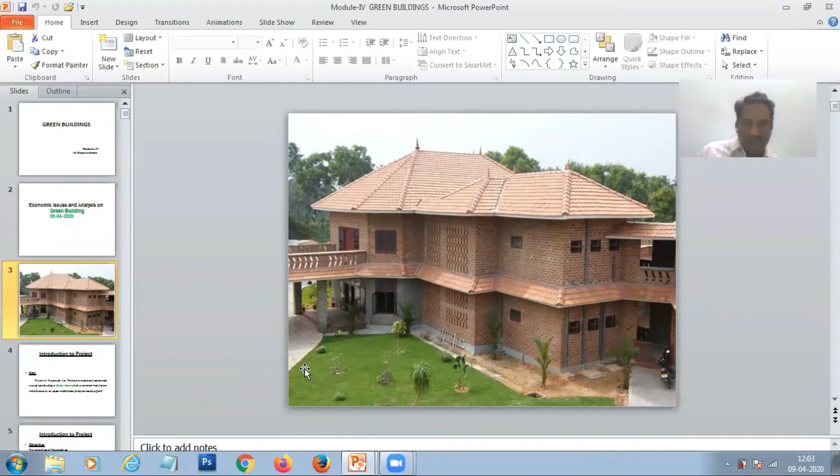This building is a green building which is made up of fly ash bricks and full of landscaping, etc. In this today's topic, we will introduce a project.

The aim of our project is to find out a simple and economical way of constructing a green home, which is affordable to a common man. That means from higher level of middle class family to a middle class family.

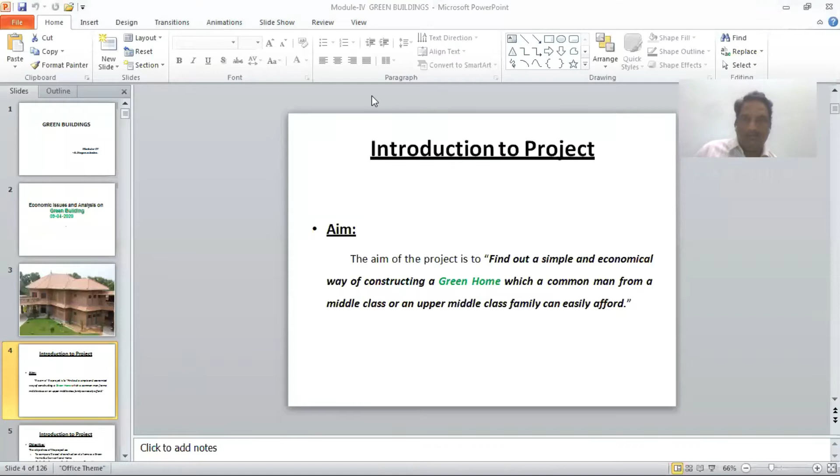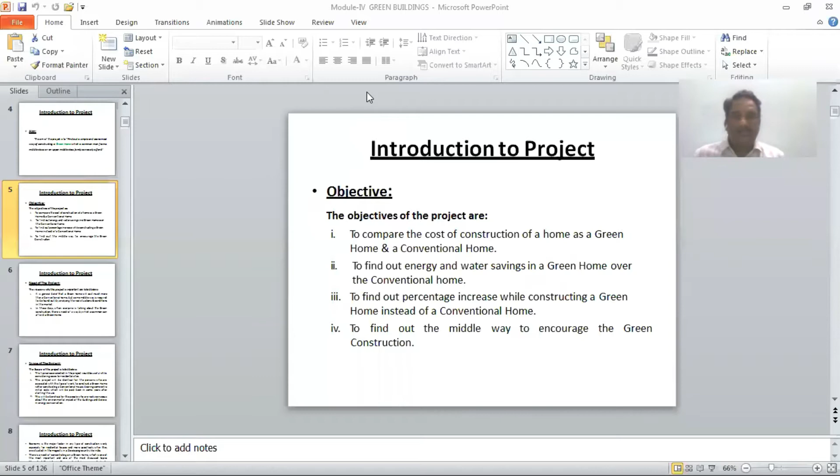For that affordable green home, we are today discussing. Second objective is to find out energy savings and water savings in green building over conventional building.

And the third objective is to find out what is the construction cost increase in green home and conventional home. That means the cost difference between normal building and green building.

The last objective is to find out the middle way to encourage the green building construction. That means finally what we have to do, we have to encourage the green building construction.

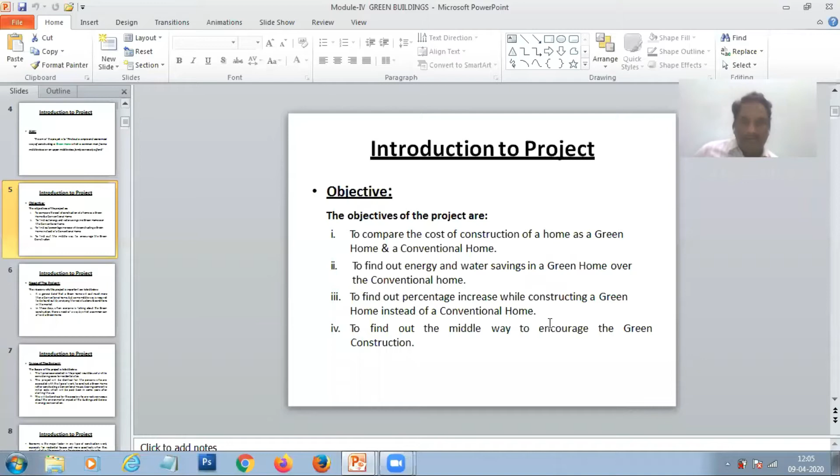Need of the project. What is the need? What is the necessity of the project? The reasons why this project is important are listed below.

It is general belief that a green home will cost much more than conventional home. That means for normal building cost and green building cost, the cost of green building is much more than conventional building cost.

Much more than conventional home, but some middle way is required to find out analyzing real situations and conditions in the market. That means we have to identify how to afford the green building with moderate economical construction. That is the need.

Second need: in these days, when everyone is talking about green construction, there is a need of a way by which a common man can afford a green home. That means a common man can afford to buy or to construct a green home. That is the need of our project.

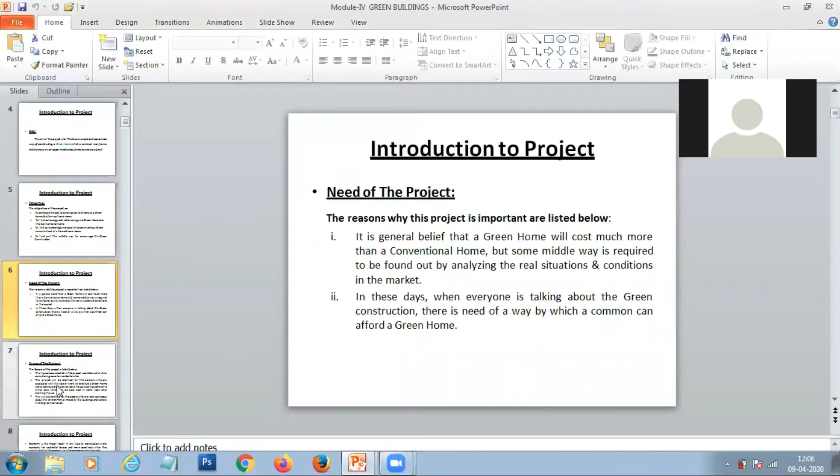Next, scope of the project. So what is the scope? The typical case selected in the project would be useful while considering cases for residential sites.

The project will be identical for persons who are associated with this type of work to construct a green home, rather than constructing a conventional house, bearing some extra initial cost which will be paid back in some years after starting the use.

That means after construction of this green building, you can avail the benefit after payback. That means you will get the benefit after the usage. That is the profit given by green building.

Hello, are you able to hear? Yes, sir. Okay, okay, okay. Okay, okay. Yes, sir. Okay, ma.

Next, the third scope of the project is this will be beneficial for the people who are really conscious about the environmental impact of the buildings and believe in energy conservation and energy savings. That means these projects are really beneficial to those who are aware of environmental impact and environmental sustainability and who look after a healthy environment for the inhabitants. These are really useful.

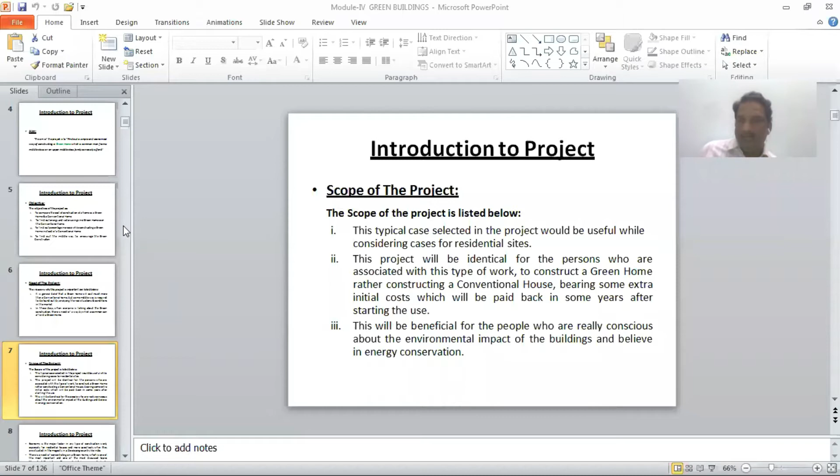Introduction to the project. Economy is the major factor in any type of construction work, isn't it? Economy means with less cost, more benefits should be achieved. So that is called economy, right?

Especially for residential houses, and more specifically, when they are situated in developing countries like our India. So there is a need of concentrating on a green home, which is one of the most important and most discussed topics throughout the world.

In the age of now global warming and climate change worldwide is happening now. So this is a compulsory need. In this situation, some middle way is necessary to find out to encourage the green constructions.

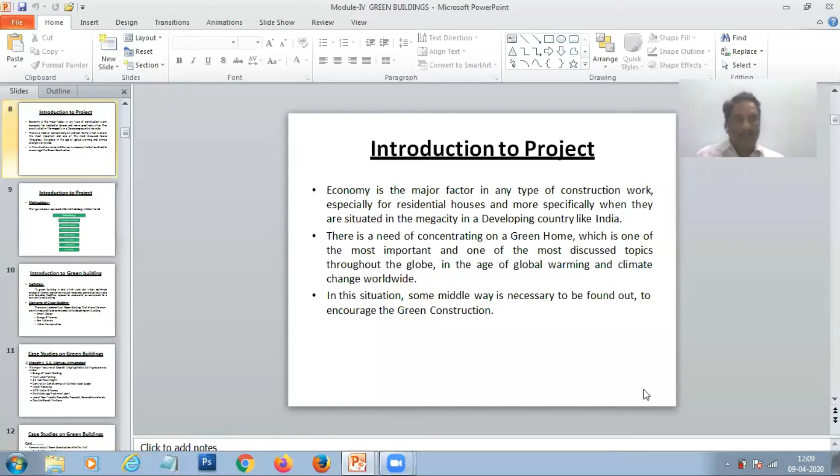Second, we have to estimate the quantities. What are the quantities required? That means what are the materials required for this green home construction, and any changes in decisions.

And next one is market studies. We have to compare the market to procure the materials. So we have to study the market, and we have to analyze regarding cost.

Cost analysis should be done, and you have to compare with respect to cost, which one is cheaper, which will give the lesser cost, and which will give the quality material. You have to compare, and you have to procure quality material with less cost, and you have to give a conclusion. Okay, this is the methodology.

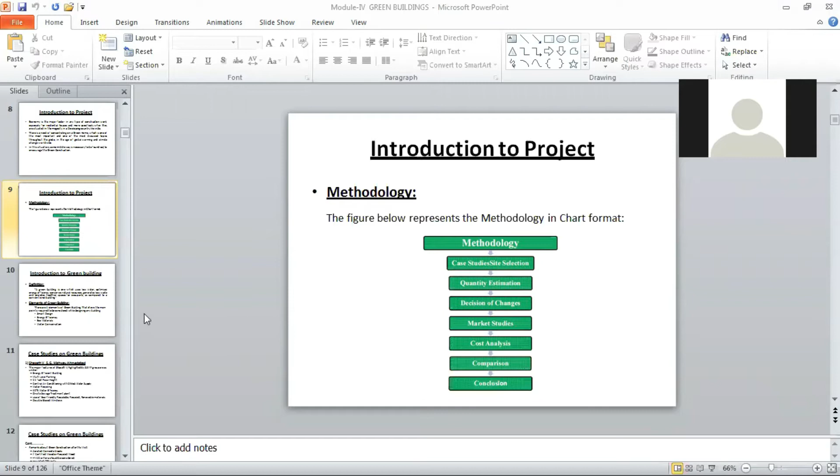What is green building? The definition is: it is one which uses less water, maximizes energy efficiency, conserves natural resources, generates less wastage, and provides healthier space for occupants compared to the conventional building.

Hello. Yes sir, yes sir, okay. My video is audible to you, I mean visible to you. Yes video, yes audio sir. Okay, okay, okay, yes sir.

Okay, elements of green building. Now please, please. So mainly there are four elements of green building.

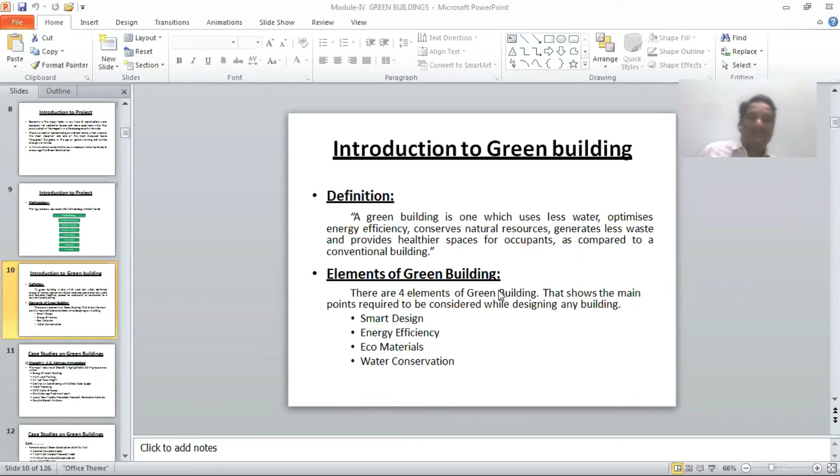First one is smart design. Second one is energy efficiency. Third one is eco-friendly material. And fourth one is conservation of water.

We will see one or two case studies in Ahmedabad, Shapath V, S.G. Highway. In this, the major features are energy efficient building, multi-level parking. You know multi-level parking, that means number of floors we can park vehicles. For example, in our Nanakramguda financial district, in Microsoft office, separate buildings are there to park vehicles floor wise. That is called multi-level car parking.

Second one is 11 feet floor height. Generally we use floor height as 10 feet. Here in this case study, 11 feet is the floor height. And central air conditioning with chilled water supply, cooling water and central air conditioning, it is there.

And water is recycling. That means used water coming from washrooms, we can reuse that water by recycling, and then that water can be used for landscaping, gardening, etc. Already we have discussed this in our classrooms. So 40% of water efficiency is saved.

On-site sewage treatment plant. That means in our building campus itself, not in our college, where this case study is taking place in Ahmedabad, there is an on-site sewage treatment plant. That means the sewage water, from our lavatories, toilets, is going to be treated, and that treated water after recycling can be used for landscaping or gardening.

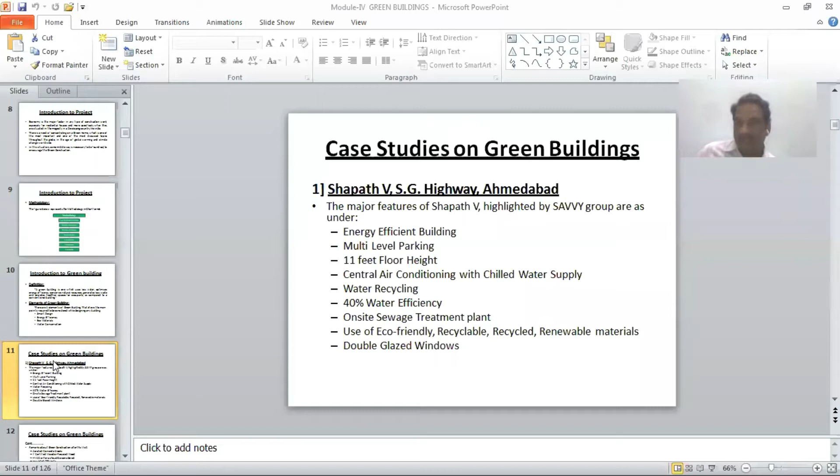Next, double glazed windows. Okay, I will see afterwards the continuation.

Remarks about green construction after visit. That means in the previous slide, those are the present building scenario, green building scenario, which was visited before the visit.

After the visit, what they find out, the remarks are: aerated concrete blocks are not used for wall construction. And the second point is their remark regarding if certified wood or recycled wood, the wood used in that building is certified wood or recycled wood - they don't know.

And next one, HVAC. Please make silence. Hello. Hello. Hello, Lokesh, someone is making very bad noise.

Okay, HVAC. What is the full form of HVAC? Anybody tell? Anybody able to tell the full form? Please note it down if you don't know. H for heating, V for... anybody, V for what? Ventilation. AC for air conditioning. Okay, that is the full form of HVAC. HVAC criteria should be considered.

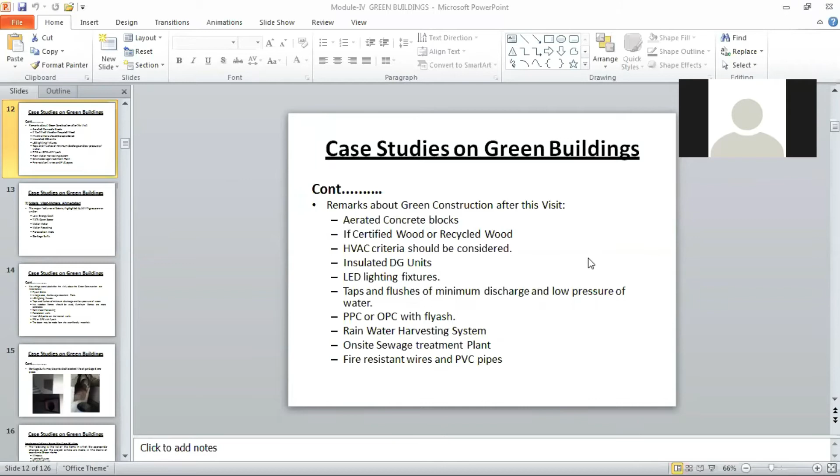Fly ash bricks can also be used for green building construction, and the rainwater harvesting system. Do you know rainwater harvesting system?

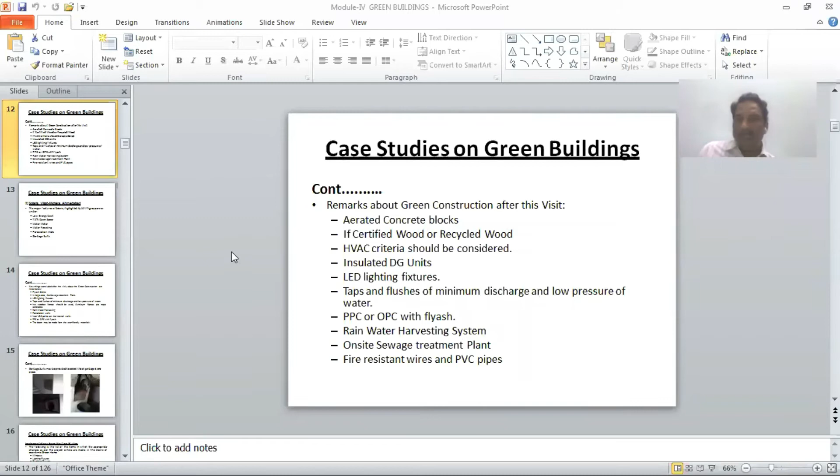Fire-resistant wires and PVC pipes. The electrical wirings in our residential or commercial buildings should be fire-resistant, and the pipes should be made up of PVC, that is polyvinyl chloride. PVC full form is polyvinyl chloride.

Okay, that is case one. The second case is in Ahmedabad, Solaris. The major features are low energy cost, and 75% open space is given.

There is also a water meter, to record the consumption of water. In every building, residential building, there will be a water meter. It will give the reading, so municipal authority people will come and take down the reading and prepare the bill. You know that very well.

Afterwards, water recycling, we already discussed. Next, percolation wells, just like recharge pits. And garbage chutes, I will show you how the garbage chute is there, to collect the garbage. Garbage means dry waste.

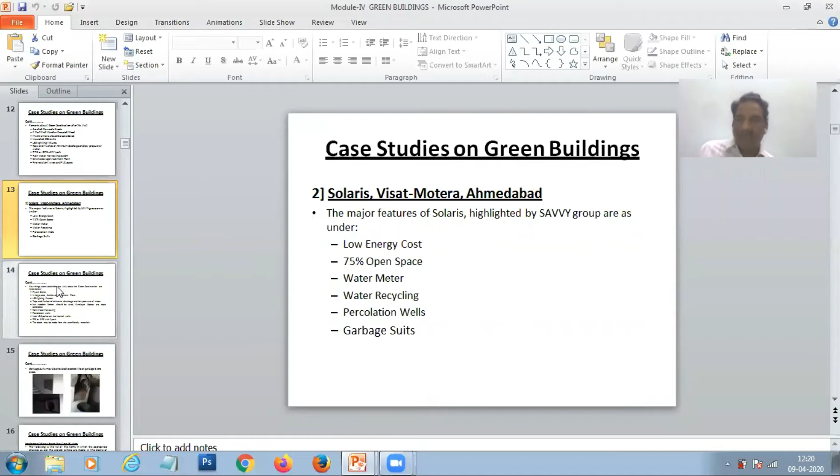Next, new things concluded after the visit about green construction. After the visit, what they found out is that fly ash bricks are used in this construction.

In the large area, a sewage treatment plant is there, and for lighting, LED lighting fixtures are to be used, because even though LED costs more, it gives bright lighting, and its life span is also more. 17 years is the lifespan of LED lighting. A normal tube light is 5 years, whereas a CFL bulb's life period is 2 years.

Taps and flushes with minimum discharge and low pressure of water are also noted. No wooden frame should be used. Aluminum frames are more preferable.

Rainwater harvesting pit is also used, and percolation wells are also installed. Non-VOC paints on the internal walls. VOC means volatile organic compound. What is volatile organic compound? In every paint, there are some chemicals present.

Chemicals like acetone, benzene, and others will evaporate and mix into the air, creating harmfulness to the occupants. So non-VOC paints, where the VOC value is 0, that type of paint is to be used in green house construction.

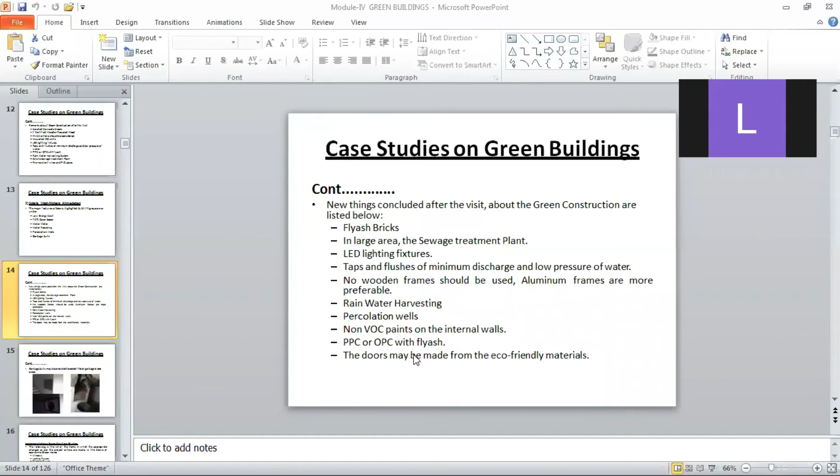PPC or OPC with fly ash. In our ordinary Portland cement also, if fly ash is an ingredient, that can also be used for green house construction. Particularly PPC is preferable for green house construction. PPC means, as I already told you, Portland Pozzolana cement.

Next, the doors. The doors may be made up of eco-friendly materials.

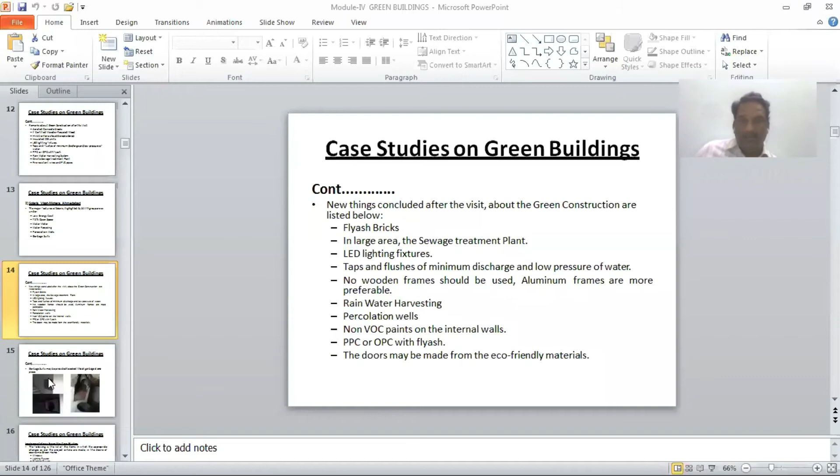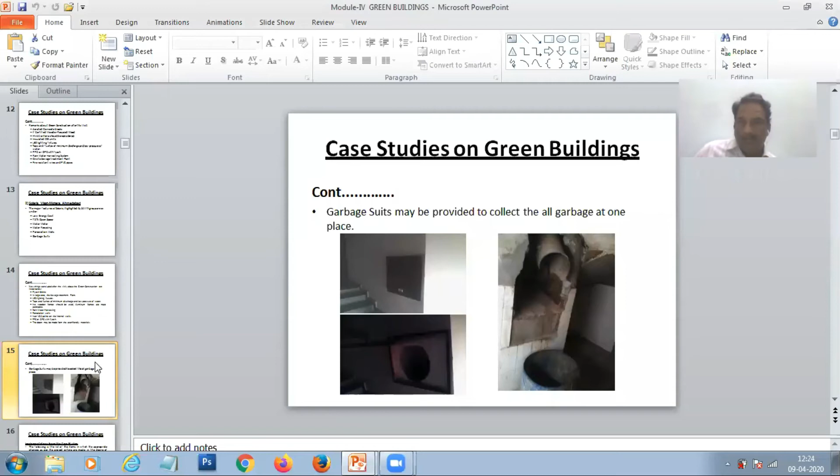Implementation of case studies. The following is a list of items with appropriate changes made as per the project criteria. Windows, as I already told you, double glazing or triple glazing windows should be used. Lighting fixtures, LED lights are to be used. Plumbing fixtures, plumbing should also use green material.

Flooring, for flooring PVC flooring is best. PVC flooring means, for example, if you see in railway coaches, the flooring is PVC flooring, blue color flooring, right? That is called PVC flooring, polyvinyl flooring. Doors and windows are used with green material wood or lumber wood.

Paints with low VOC value, I already told you, no? Low VOC. VOC, what did I tell you?

Paints. Anybody? Are you hearing or not?

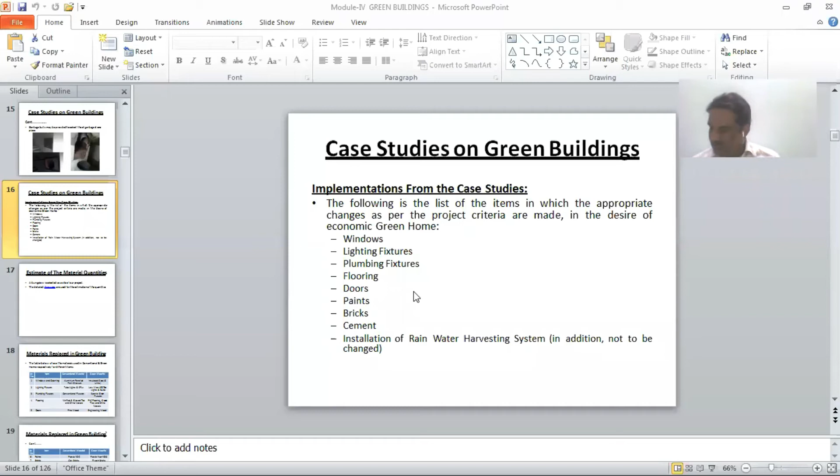Volatile organic compound, called VOC, contains benzene and acetone which get evaporized and produce harmful gases, harmful to occupants. So paints with higher VOC values should be discarded or rejected, and paints with lower VOC content should be accepted, preferably zero values.

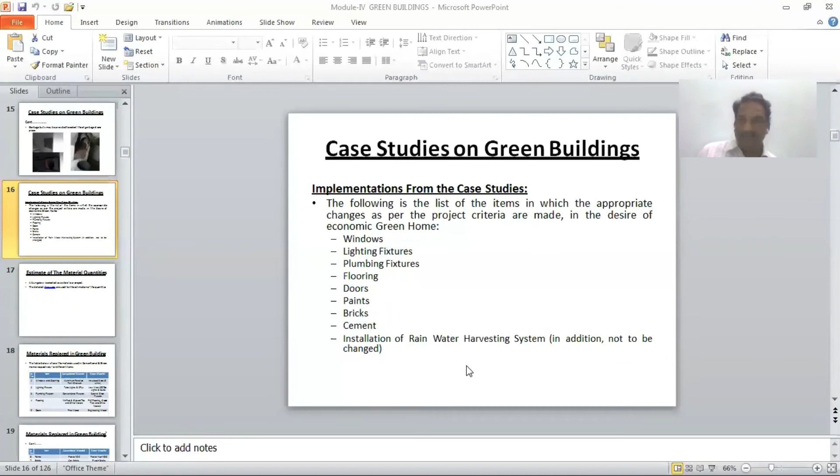Regarding bricks, clay bricks should not be used; fly ash bricks are to be used. For cement, PPC should be used. OPC can be used only if it contains fly ash, otherwise OPC should not be used. Installation of a rainwater harvesting system should also be used.

Next, we have to estimate as per the drawings, comparing materials used in conventional buildings versus green building materials. For window openings, conventional buildings use aluminum panelled plain glasses, while green buildings use insulated glass, IG.

Second point, lighting fixtures: tube lights are used in normal buildings, LED tubes or lamps are used in green buildings. For plumbing fixtures, conventional fixtures are used in conventional buildings, while special green plumbing fixtures are used in green buildings. For flooring, normal tiles are used in conventional buildings, PVC flooring should be used in green buildings. For doors, pine wood is used in conventional buildings, while engineering wood or lumber wood should be used in green buildings.

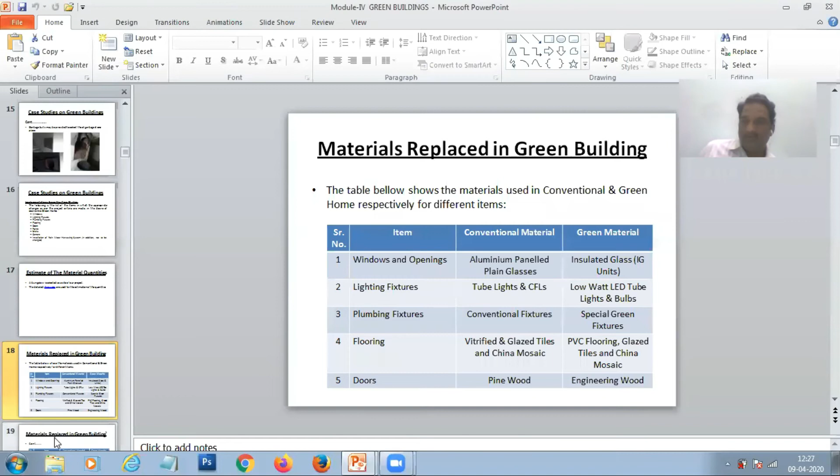Continuing: plastic VOC paints are used in conventional buildings, while non-VOC paints, having zero VOC content, should be used in green buildings. Clay bricks are used in normal buildings, fly ash bricks should be used in green buildings. For rainwater harvesting, conventional buildings do not provide it, but in green buildings we must compulsorily provide it.

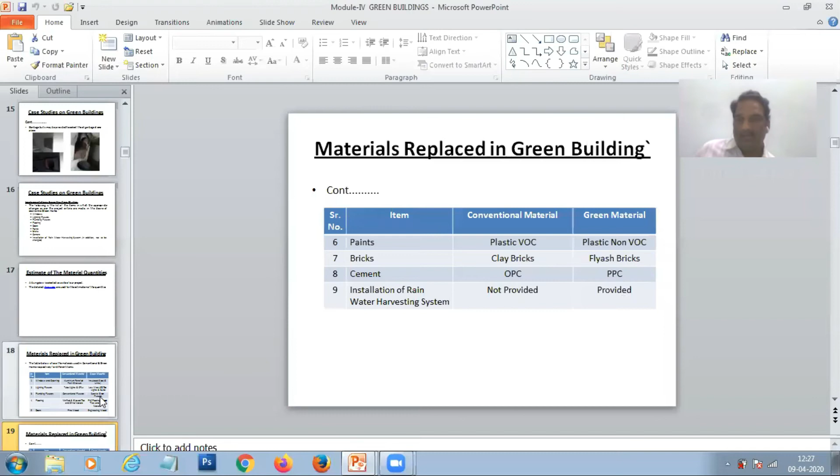Next is glazing, IG, meaning insulated glazing. Here you see external and internal glass - outside is one glass, inside is another glass, with a gap in between. This gap is filled with gas or other materials, with sealing compounds at the bottom. These are numbered: 1, 2 is the external glass, 3, 4 is the internal glass. Nearly 15 to 20% of all home energy is lost via windows and doors.

So we have to use energy efficient windows, preferably insulated glazing windows, DG, double glazing. This is double glazing - 1, 2 are two glasses, hence double glazing. From the external side, heat is absorbed by glass 1, 2. After that, it is restored, and a cool atmosphere is maintained inside the room because of the internal glass.

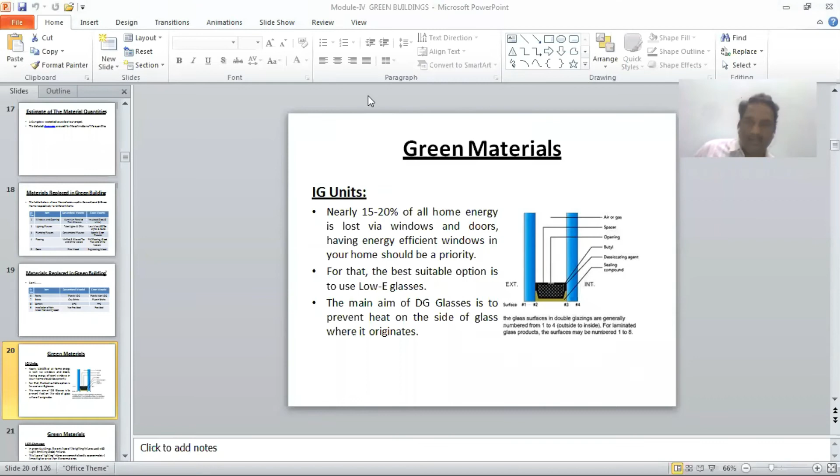That is about IG units. Next, LED fixtures - light emitting diode - are to be used for green buildings. In green buildings only LED fixtures are to be used. These are costly, approximately 4 times more than normal bulbs, but they are solid-state lights which are extremely energy efficient.

Hello, hello, are you there? Yes, sir. Okay, okay, okay.

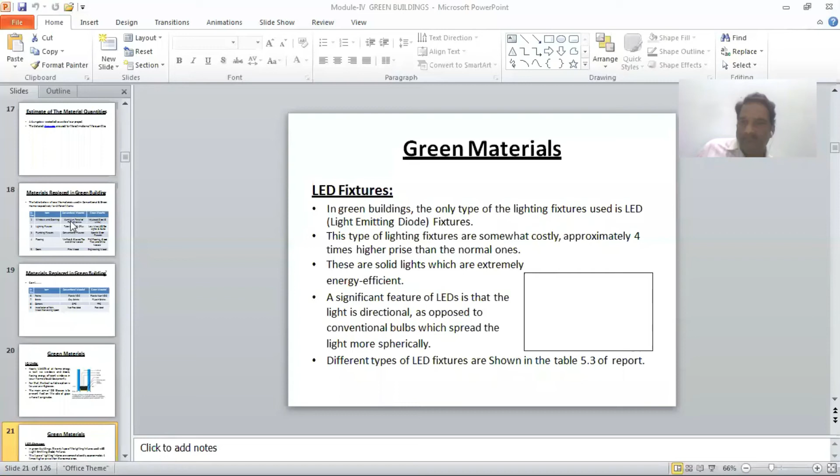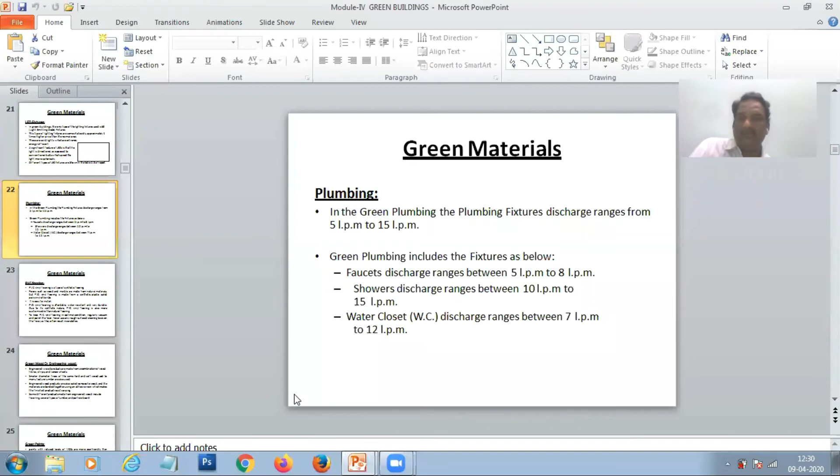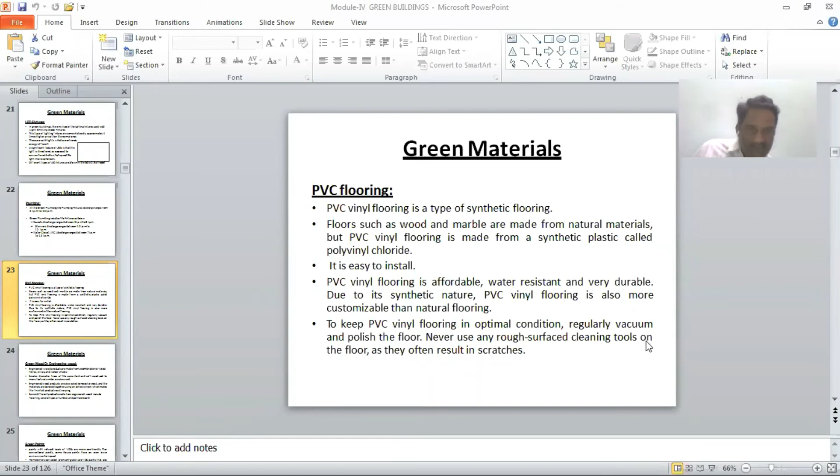Next, PVC flooring, polyvinyl chloride flooring, gives a good look and should be provided in green buildings. It is stuck with an adhesive material and is easy to install. If cleaning, don't use any rough surface cleaning tools on the floor because they will give scratches.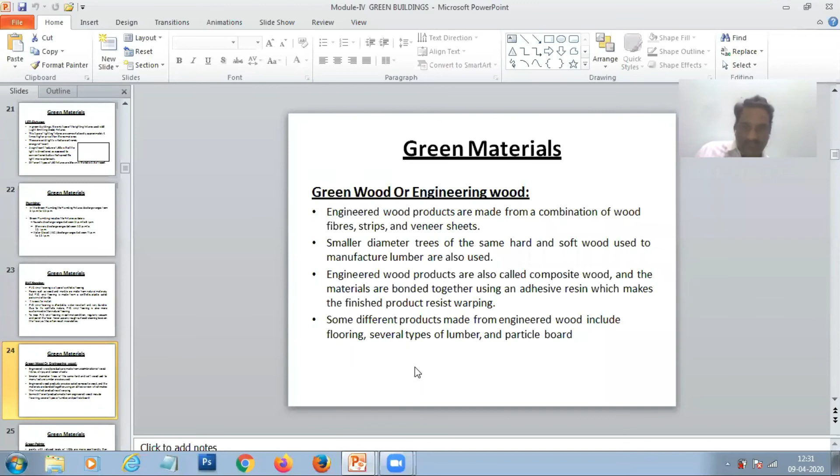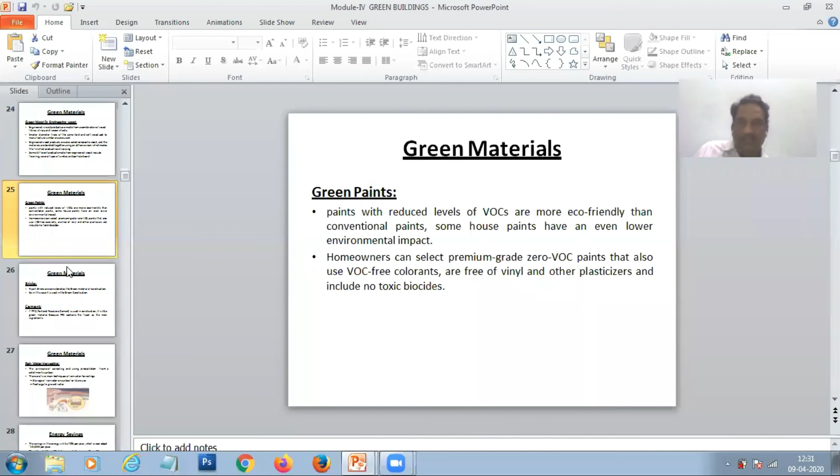Green paints, I already told you, low VOC paints should be used because normal paints contain toxic materials and toxic gases. Next, bricks - fly ash bricks should only be used, clay bricks should not be used. Cement - PPC has to be used.

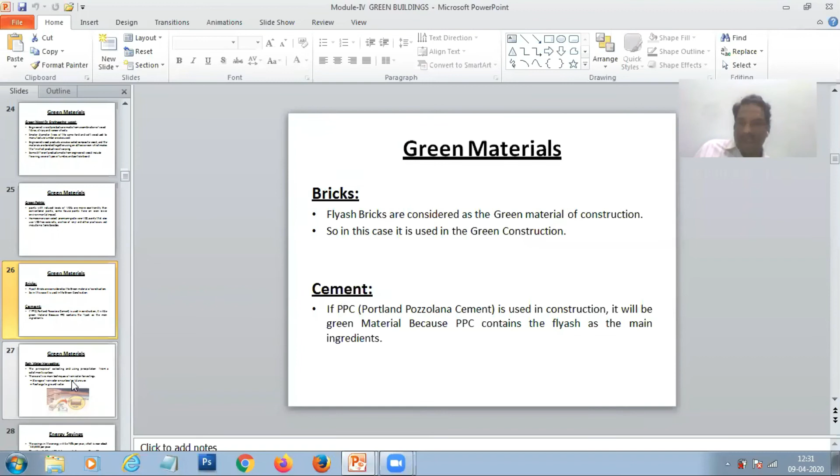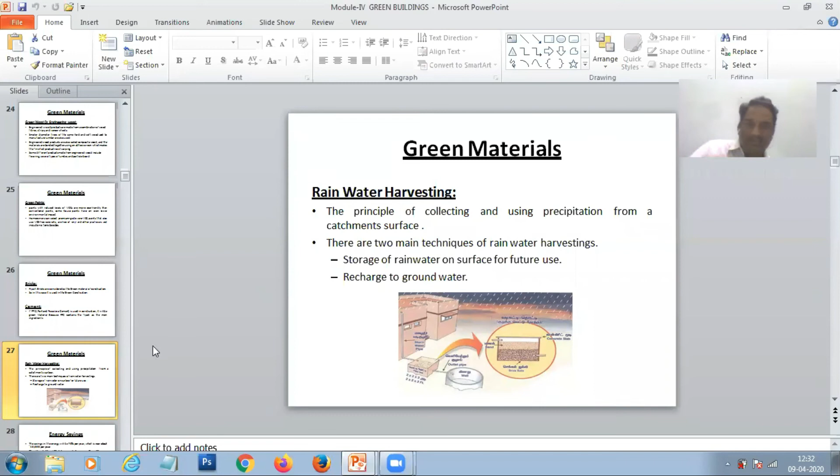OPC with fly ash can also be used. Next, rainwater harvesting system - this is the rainwater pit. After excavation, we construct a rectangular structure below ground level. We put coarse aggregate and kankar, then fine chips afterwards. The water will be absorbed by this construction and it will recharge the groundwater. For storm water and rainwater, we have to use recharge pits.

Next, energy savings - 70% per year we can save by using green materials. I already told you the lifespan of LED fixtures is 17 years, whereas our normal tube light is 5 years, and CFL bulb lifetime is only 2 years.

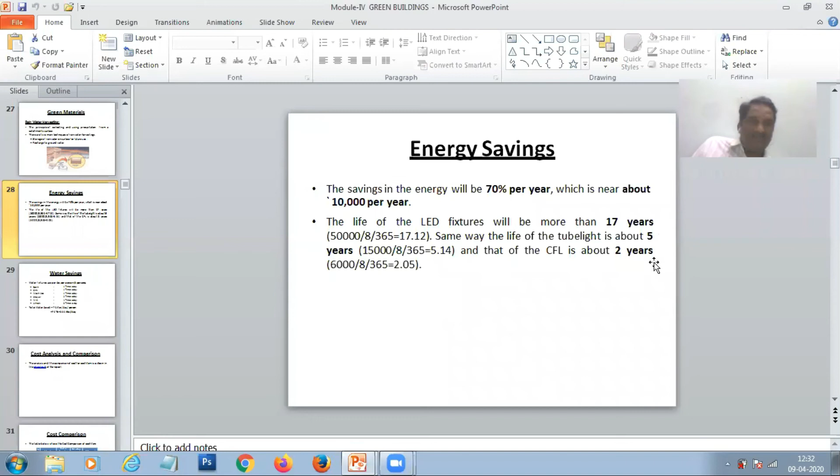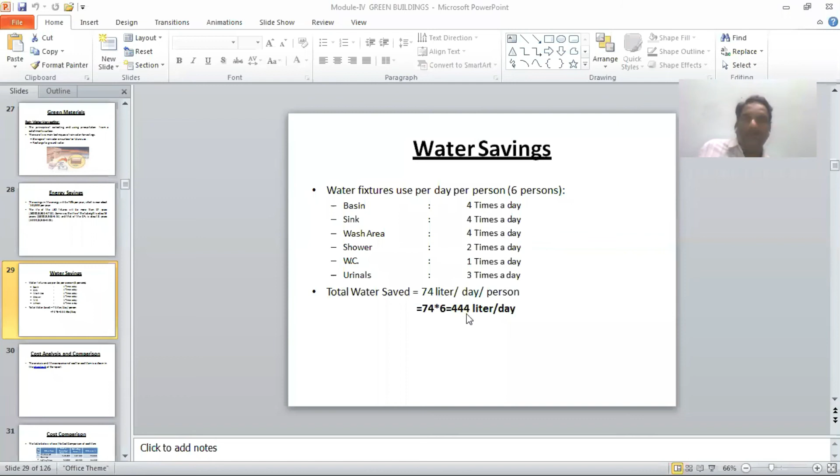Water savings - I already told you. In a home, suppose 6 persons are there. We will use wash basin 4 times a day, sink 4 times a day, wash area 4 times a day, shower 2 times a day morning and evening, water closet 1 time a day morning or evening according to our wish, and urinals 3 times a day. Total water saved is 74 liters per day per person. If you have 6 persons in a house, 6 into 74 equals 444 liters per day we can save by using green materials.

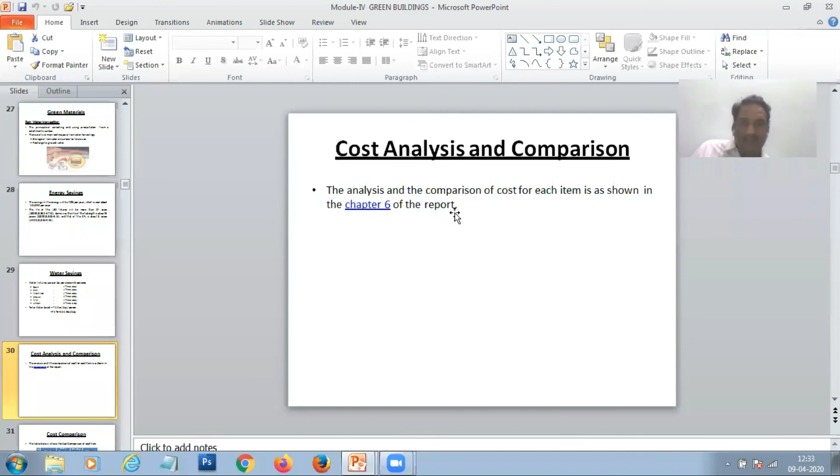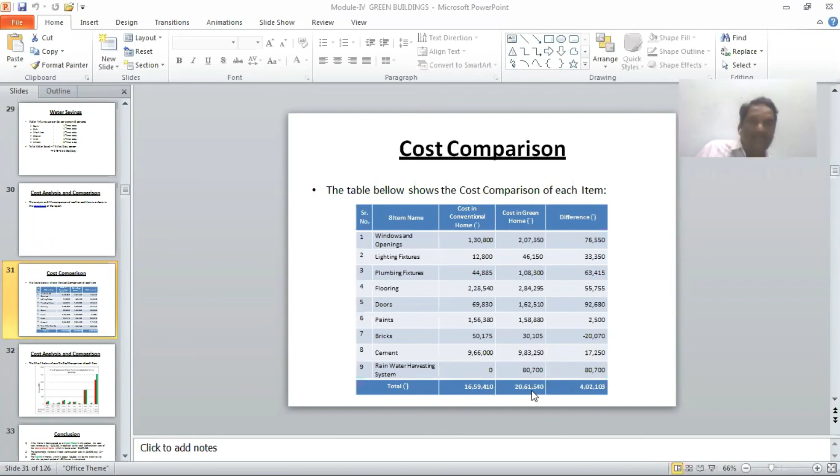If you use fly ash, it will be more economical compared to clay bricks. Cement: 9,66,000, whereas if you use PPC, 9,83,000. Rainwater harvesting in conventional building, normal building, we should not use, so it's 0. Here, if you construct a pit, it will cost around 80,000. So finally, total cost for normal building is 16 lakhs, here 20 lakhs - 4 lakhs difference is coming, right?

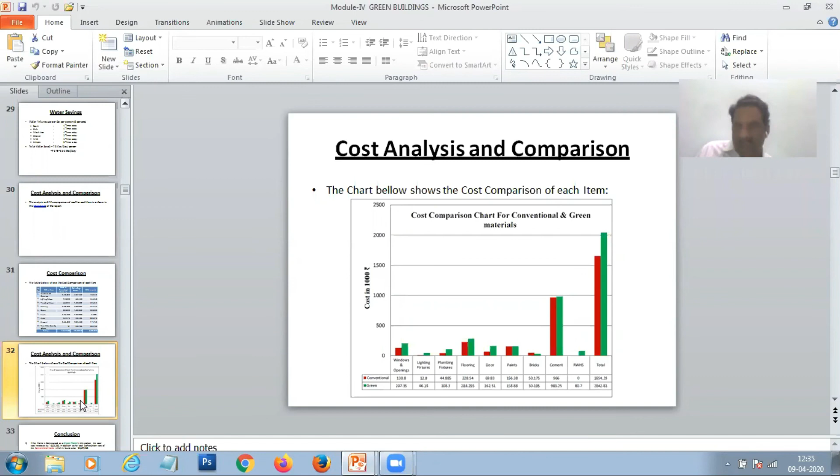Even though, what is our conclusion is, if the home is constructed as a green home in this project, the total cost increases by 4 lakhs, in addition to the 31 lakhs which is the total cost of construction. Plus if you use green material, 4 lakhs will be additionally added. So the percentage increase in total construction is 12.94%, which is in the range of 12 to 15%.

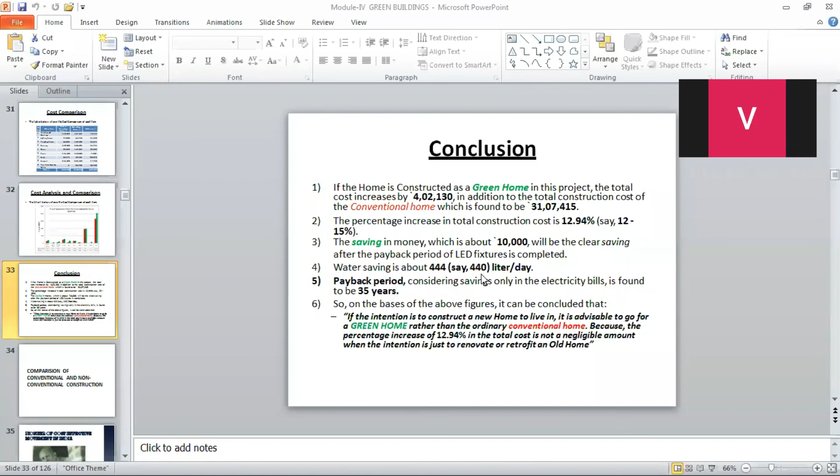So the saving in money, which is about 10,000, will be the clear saving after the payback period of LED fixtures is completed - that means after 17 years you can get this saving in money. So water saving we have already calculated as 444 liters per day for 6 persons. So payback period, considering savings only in electricity bills, is found to be 35 years.

So I already told you, if you are using LED lighting, the lifespan is 17 years, and tube light is 5 years, CFL bulb is 2 years. So the payback period means after usage, you will get the benefit, you will get the savings.

So on the basis of the above figures, it can be concluded that if the intention is to construct a new home to live in, it is advisable to go for a green home rather than a conventional home, because the percentage increase of 12.94%, in the range of 12 to 15%, in total cost is not a big amount - it is negligible. When the intention is just to renovate or retrofit an old home, you have to maintain it. If you construct a normal building instead of green building, your maintenance cost will be more. So if you prefer green building, that maintenance cost you can save.